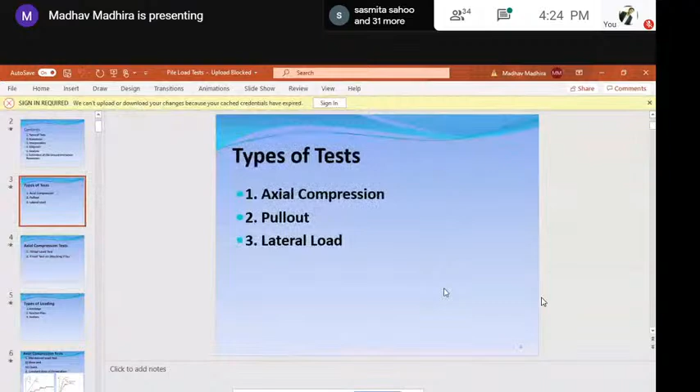Then on the working piles, we had, yes. Slides are not visible. They are not shared. It was there. Since you logged out and again logged in, you have to share it again. Sorry. Again, I don't see that. Let me log out. Very strange. How about now? Not yet. It's there on my screen, and I said share. You select the share window and then choose PowerPoint. Present now, your entire screen. Okay, then I click on this. How about now? Now it is coming. Okay, thanks. Sir, you press on the hide thing. Full screen, you can make it full screen. To the right of stop sharing, hide is there. Okay.

My apologies for the technical problem. So the contents of my talk would be types of tests, procedures, interpretation, diagnosis, analysis, and pile ground interaction parameters. The types of tests we talk of, as I said, are mostly for axial compression. We may like to do pull-out too, and lateral loads are an option where the buildings are tall or the tower is very high, particularly for wind turbines. That is important. Then we do two types of tests.

One is called the initial load test. This is done before the piles are installed for the structure's foundation. This is to verify whether our design is correct or not. If the estimated load is much less than what is possible from the field, you can revise your design so that you save a lot in terms of number of piles. Whereas if your design load is more than the actual result from the load test, which means the soil is not able to take it according to our estimate, we have to redesign, maybe increase the number of piles.

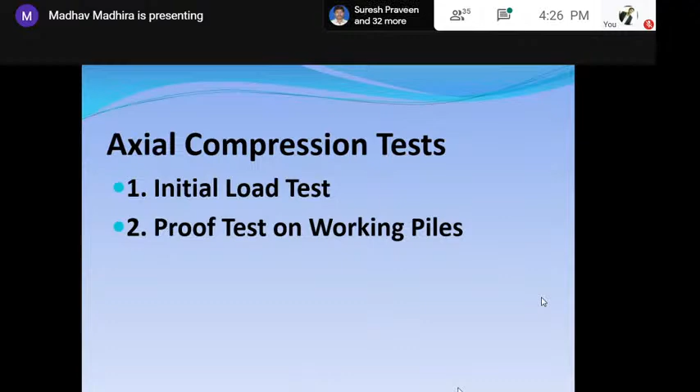After that, once the construction starts, we have to test a few piles, roughly 1 in 100, 1 in 50, 60. We verify whether the design load is being achieved or not, particularly with respect to settlement. Initial load test we carry on for 2.5 to 3 times the design load if failure is not possible within that range, and then we try to extrapolate to get the failure load. Whereas proof testing is generally carried out to 1.5 times the design load, and we make sure that the settlements are within the allowable range of, let's say, 10 or 12 millimeter at working load itself. These are the kind of tests we do. Then the types of loading: you put a dead weight, called kentledge.

So you have to create a huge dead load by stacking girders or concrete beams or sandbags, etc., so that you can take a reaction through the jack and get the loading. Another alternative would be to take reaction from adjacent piles. Suppose I have a number of piles in a group and I want to test one of them, I can take reaction from the other piles and do it.

Third, if I don't have those, I can provide anchors, 2 or 4, whatever it is, connect them up and then take the load. In this case, the load is transferred back to the ground through anchors. It's very similar to reaction piles.

Then in terms of the types of tests we do, one is called the slow test, wherein you apply the load in increments. And the increments according to our code is, very unfortunately, a small number. They say 4 is enough. That means 25%, 50%, 75%, and of course 100%. I, for one, would prefer a 10% increment in load, and then you maintain the load, so that the displacements more or less become constant under each load. Then increase the next load and go. That is called the slow maintained load test.

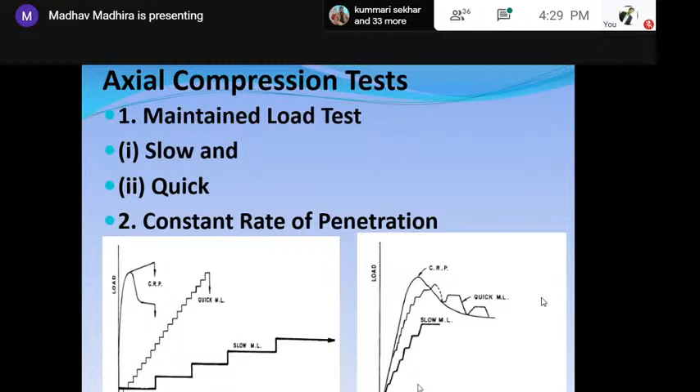The other one which people wanted to do, like your triaxial test, etc., is the constant rate of penetration. It used to be very common that people were trying this earlier. They push the pile continuously and take the reaction. That means the displacement rate is constant, but the loading rate is not. And if you look at the curves on the right, you can see the slow maintained load test gives you a lesser load than either of the two. Maybe at large displacements they may all become equal, but at working load, the slow test gives you more settlement and less load. So we need to always go for a slow maintained load test.

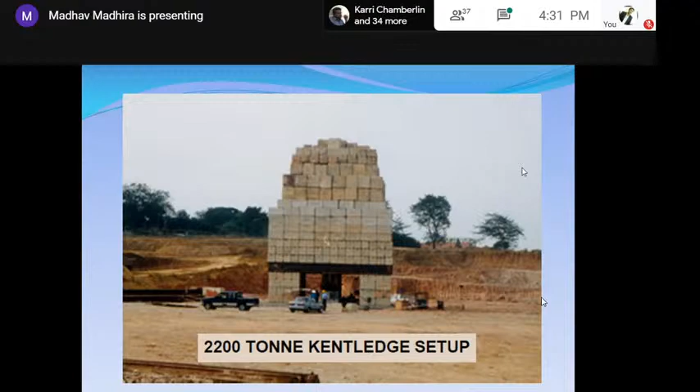You can see the kind of load. This is a huge pile that they are testing. The total load they were expecting was around 2,200 tons. That means the kind of cement block they put in, if you look at the person's height, is maybe something like 8 to 10 meters high, which is a very risky thing. But this is the problem with most pile load tests. If you want a high capacity and do the test, it can be very risky sometimes and very costly too. So please remember that pile load tests are very expensive, so we should be very careful and make sure that we can get away with the minimum number of required tests for the initial load test.

This is the typical Indian version where we keep on putting sand-filled bags, jute bags, or polythene bags, etc., unlike the blocks that we have. And of course, here you cannot get probably more than 200 to 300 tons capacity.

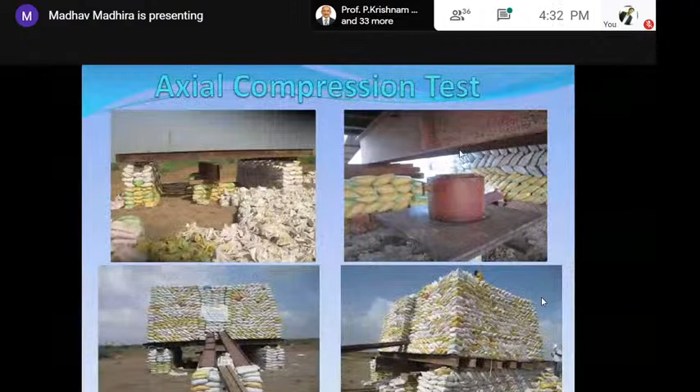And even to reach the top, you need to have some kind of a ladder or a slope. Then if you want to do the actual compression test, you need the jack, as you can see here. And this jack is adjusted so that you can get the reaction from the beam at the top. So please note that it's not a very simple thing we had to do. But more recent ones are simpler than this.

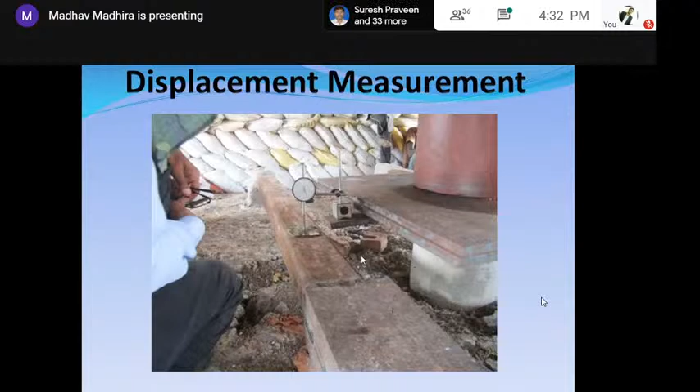We'll see that later. When you want to measure the displacement, you have to have the support as far away from the pile here. So we put another huge beam or I section, support it far away, and put our dial gauge and take the displacement of the pile with respect to the datum that we have put in. So this is a dial gauge, but nowadays we have LVDTs and electronic ones too. So this is the kind of schematic we're talking of.

And one other thing I wanted to tell, which maybe the industry may not like: make sure that the pile is not preloaded without your knowledge. This happened a couple of times in my experience. So what we do is we take the jack with us away so that the pile contractor cannot preload. What if it preloads and unloads it? Next day when you go, what you get is only the reload displacement and not the original one.

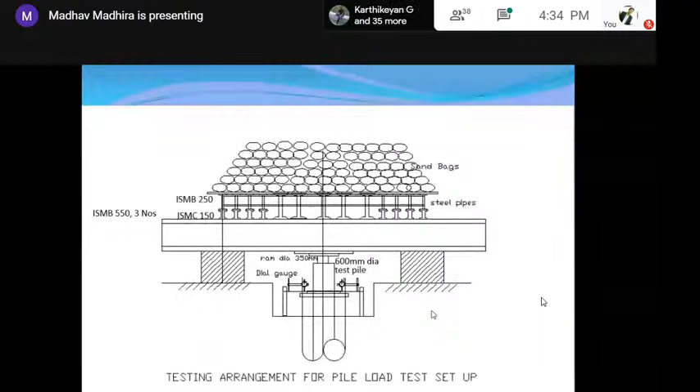This is another pile tested, 600 mm diameter. And you can see very similar ones, a lot of sandbags, heavy I sections to do the whole thing. The load is sometimes not measured through a load cell. We have a proving ring also to take care of it. And here, as I said, you can have dial gauges or LVDTs. And this pit is to put the pile at the cut-off level and not at the ground level.

Jacking method is another, wherein, of course, this is basically the same thing. We are using a hydraulic jack and then we keep pushing it, which is the same as what we are talking about. In order to minimize the interference, as I keep saying, you keep it as far away as possible. In this case, of course, not Kentledge, but more of anchors and reaction piles. And you can see that if this is the pile tested, the support system is very far.

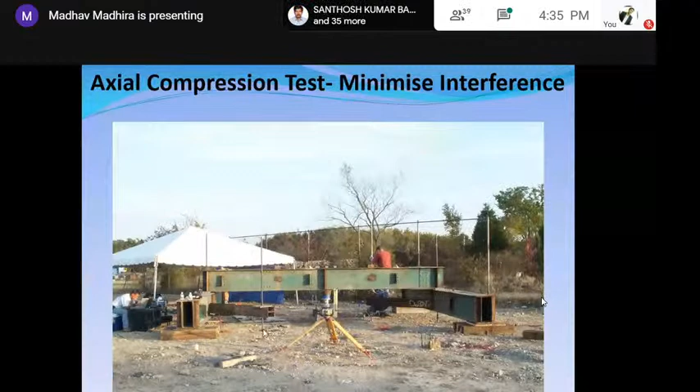When you try to measure the load settlement response, if you have an idea of how it is going to be, I want you to visualize this. This may be the total load settlement response, but if you look at the shaft response, the shaft is mobilized at a very small displacement. Let me assure you, most of the time, the shaft resistance is fully mobilized within about 5 to 6 millimeters of displacement. Whereas the base resistance takes a large displacement, maybe 10, 20, 50 mm too. So actually at working load, you can see the shaft is the one that contributes most of the load. So you should be able to see if you can modify your load test in order to find out.

If you can't, we'll see at the end of my presentation how to estimate these components: how to estimate the shaft resistance, how it is mobilized and the ultimate value. Similarly, the base initial stiffness and the ultimate base resistance too. This is what I call, you need to analyze the whole thing and not just say, I got some safe load at 12 mm settlement. You need to understand how this load is getting mobilized in the pile.

And sometimes you find that when you do the test in case of either dense sands or medium dense sands or clay, you may get the shaft resistance, and then there may be some kind of softening possible, because this is the strain softening you get after the peak. So you can see shaft resistance may not be fully mobilized after a certain displacement.

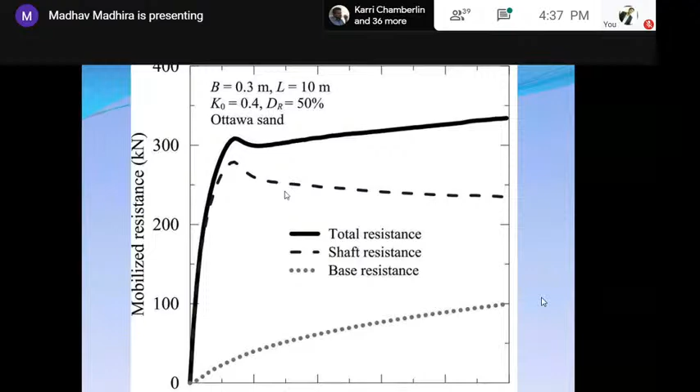Many times, what we do is we load, unload. So you can see here, if I have the time load curve, initially load is increased up to 300 tons. Then we unload. In the second cycle, the load is taken up to about 600 tons, unload, and then we go to the 800. So when I look at the displacements, we maintain the load, then we unload, we get some rebound, but then in the second cycle, the rebound is much less, so you have permanent settlement.

And when you go to the third cycle and unload, you may end up with something like even 15 mm permanent settlement. This is particularly necessary when you have cyclic loads or wind loads coming onto the pile. So this is the kind of curve you can get. First cycle, unload, second cycle, unload, and third cycle. You can see, as I said, the permanent settlement is on the order of 10 millimeters, total was 22. So the rebound is about, say, 50% or a little less than that, and you get this kind of behavior when you do your stage loading or increments in cycles.

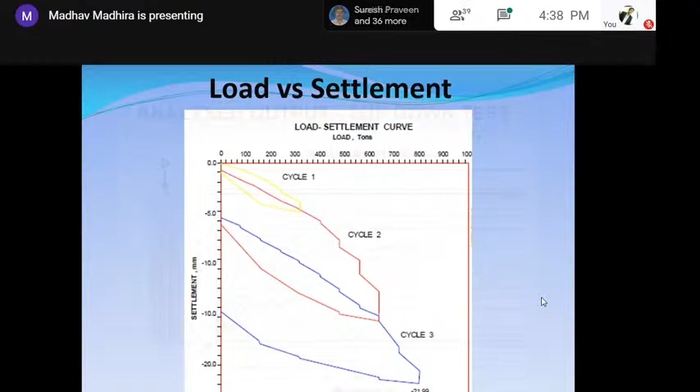I want you to analyze this kind of a thing. If it is possible, I want you to visualize how the load is being transferred from top to bottom. And I want you to visualize this something like your seepage. When you have seepage, the flow takes place from the upstream to downstream. And similarly, the load is getting transferred from the top to the bottom.

Somehow we think the end bearing piles are great. Only if you have extremely soft soil does it happen. In many of these soils of intermediate capacity, at working load, the base load is not very important. So I keep showing this in order to illustrate it is the shaft resistance which controls most of the time.

Okay, then if you have the instrumentation, if I have only the top displacement gauge at the top, I can get the displacement at the top. But we have no idea about how much is the displacement at the toe. And the displacement that you see is because of the compression of the pile and the settlement of the toe because the soil is compressible. So these are the two things we need to measure.

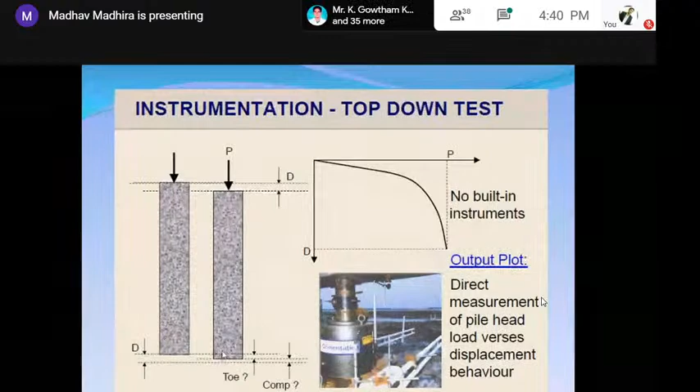And in the modern version, you will find people are trying to measure the displacement all along the pile, which is a very good thing, and particularly at the toe too. So if you don't have an instrument, this is the kind of thing you get. But if you have good instruments, you'll be able to predict or measure the toe displacements and those at intermediate points.

I want you to realize the importance of interference. You know, even if I do the Kentledge or dead weight, before I do the load test, this is the pile. I have the two footings here on which I'm putting, let's say, 600, 800 tons, which means that load is getting transferred through these two bases adjacent to the pile, and the soil below will try to get compressed, it will settle. As it settles, it is trying to pull the pile down, so you will end up getting a down drag on the test shaft. Please remember, already the dead load, before you started loading, is itself causing the pile some down drag.

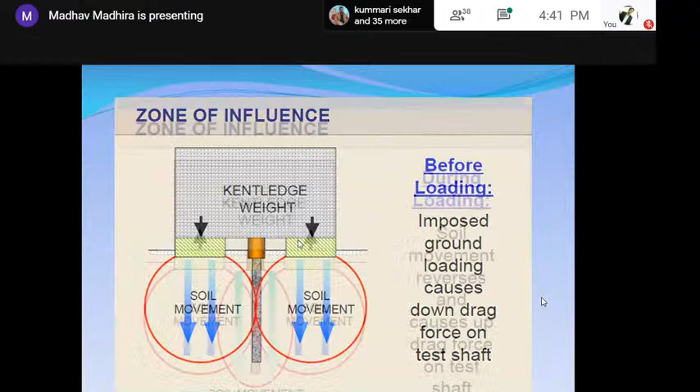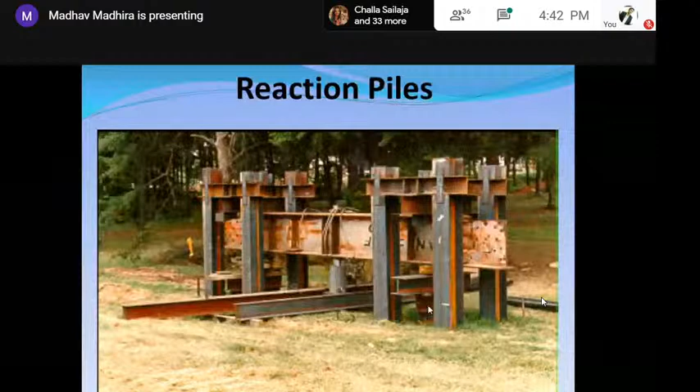The load is getting transferred here, which means the load is transferred to the pile and the support system is carrying less. So the soil movement here is negative, is upward, whereas here it is downward. It's a very complex interaction that you will find, and what we think is the ideal pile response, it's not really true. When you have reaction piles, what we do is one pile here and adjacent piles here, and we try to transfer the load here.

These are the two reaction piles in a pile group. So when I connect with the beam and again apply the load, these are subjected to pull out here. Again, you have to maintain a minimum spacing of at least 2 meters away from the test pile. Otherwise, you may get some interference. People say 2 meters or at least 3D, so which is 600 mm diameter means 2 meters is good enough. So these are the kind of interference effects you will have on the pile.

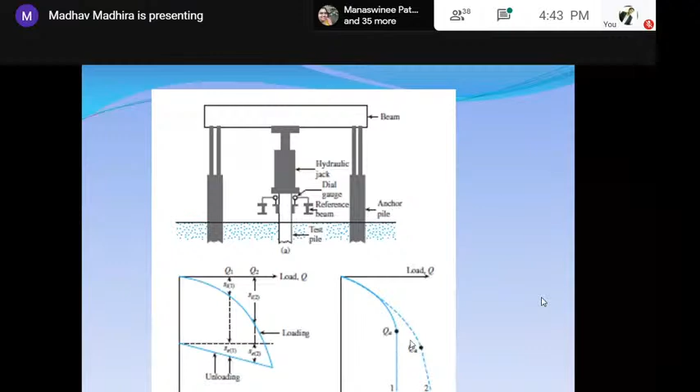Okay, so you can see here the effect of these two would be loading and unloading, and when you unload, you will find the net settlement is much less than what you get during loading. This is what I wanted to show you with regard to anchor piles too. In this case, the load is transferred to the bottom of the anchor pile or the anchor. So these are the reaction piles, and zone of influence, maybe you can take some 1:2 kind of. So when the reaction is taking place, this part of the pile will get affected because of the load transfer on either side of it.

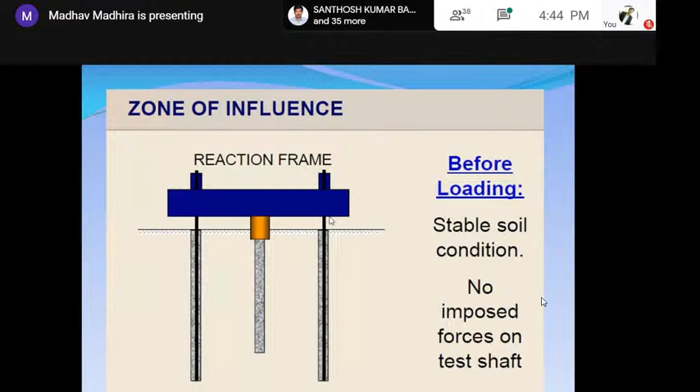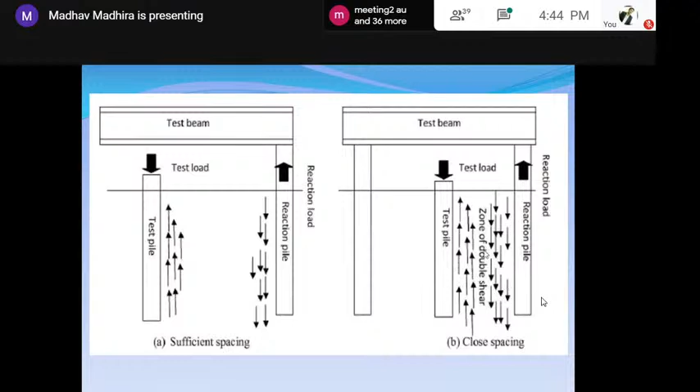These are the tension piles, as I said again. Influence zone, reaction frame, no forces. But now if you have, during loading, the tension pile may have some interference here, depending on the spacing. So if your spacing is more than 3, some codes specify 5, so you better decide that the spacing can be large enough. This is what happens. When I put the load, the soil will try to oppose, the shear stress is upward. But as far as the reaction pile is concerned, because it's under tension, the soil is trying to oppose it, you'll have downward. In this close spacing, you will find that the two are interfering with each other, and the response of the pile may not be ideal, what you can see.

There's another interesting test somebody devised recently. He said, I don't want the whole pile to be tested. He wanted only a part of the soil bearing stratum. For example, this part is not necessary or required in terms of load transfer. So what he did was he cast a grout plug here, put a steel plate and pulled this up. So you have only the shaft resistance mobilized in the bearing stratum, and we're not considering the resistance in the upper one. If you want to isolate, this is what is called the plug test.

But again, I have one issue here. When you are pulling it up, this is a load test, because it's a pull-out test, we are getting the tension kind of a thing. The shaft resistance under pull-out may not be the same as in compression. That's another thing we will see. And sometimes you find that the plug movement may not be immediate, which means there's always a slack. You have to correct for it. And then if you correct, they can have an ideal.

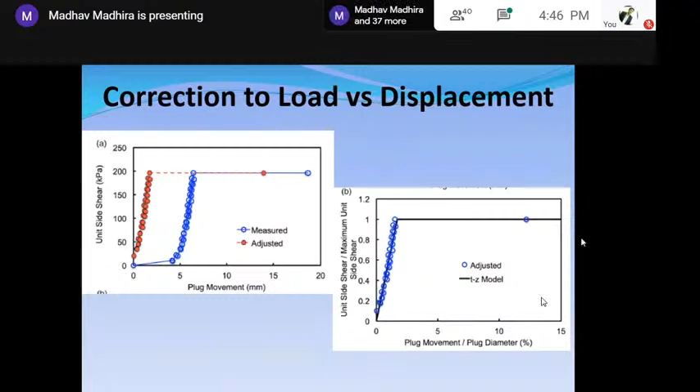This is because it's purely a shaft resistance. You will find that the shaft load is mobilized at very small movement to pile diameter ratios, maybe less than 2% as we expected. And after that, the shaft resistance is at the ultimate value. This is called the plug test. The problem, as I said, when you have these heavy loads, and if you don't anchor them and make sure everything is perfect, this kind of failure.

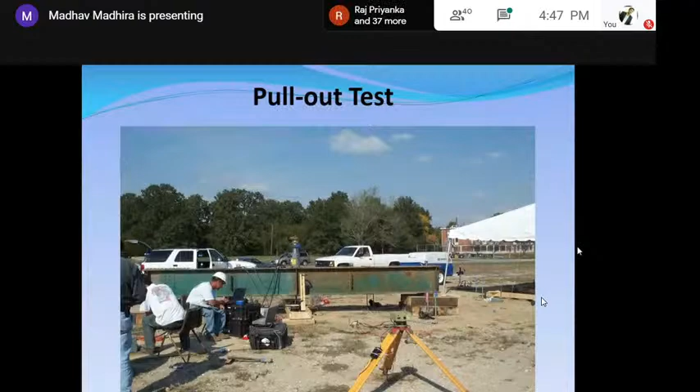The displacement should always be far away, and you have to put the support as far away as possible to get your displacement safely. Don't let anybody get near the load. Make sure you do this kind of thing.

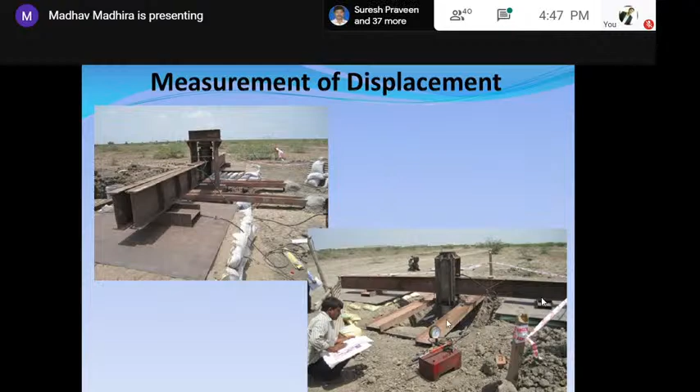So this is the schematic of the pull-out test. This is the pile and it goes into the jack, and then from the beam you take the reaction. And these piles will now be under compression because this is being pushed up. And so these are the two dial gauges. We have enough space so that the travel can be measured.

Then when you do a lateral load test, I want you to realize a very interesting aspect of it. A pile, if it is not embedded in a pile cap, is free to displace and rotate at the top. Then it's called a free head pile. Most of the piles we test in the initial load test are free head.

But when we actually construct the real pile, it will be embedded inside a pile cap, which means it is not allowed to rotate. It can displace laterally. So the pile's head is fixed. Behavior of a free head pile is very different from behavior of a fixed head pile. So you have to use appropriate theoretical conversions or correlations so that whatever response you get from a free head pile can be changed to fixed head pile.

This is lateral load testing. You can have a pile and then get the reaction. What we sometimes do is use two piles and push each other. That's much simpler. Unlike in the case of axial load, you don't need a kentledge. Here you are taking reaction from another pile, but you are not measuring the displacement of that. But more commonly, here you can see, taking reaction, you are pushing one and measuring the displacement.

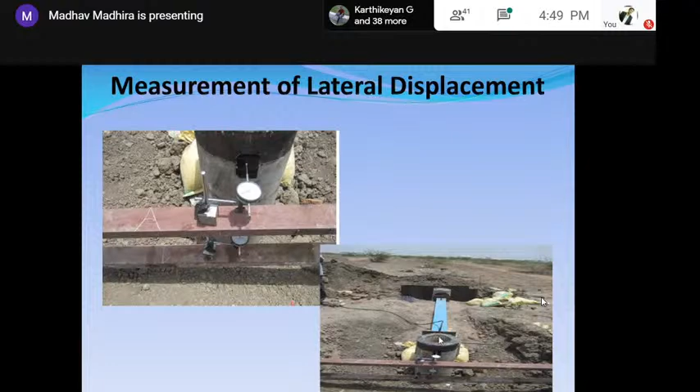But you can also have a two-way test, which means I have one pile here, another pile here. I put a jack and I can push both of them, and I get two for one. So you're testing two piles at the same time and you can then get the response. This is a much better way of doing it rather than taking reaction from a dead load or a pile cap somewhere. So this will be a better way of doing the test.

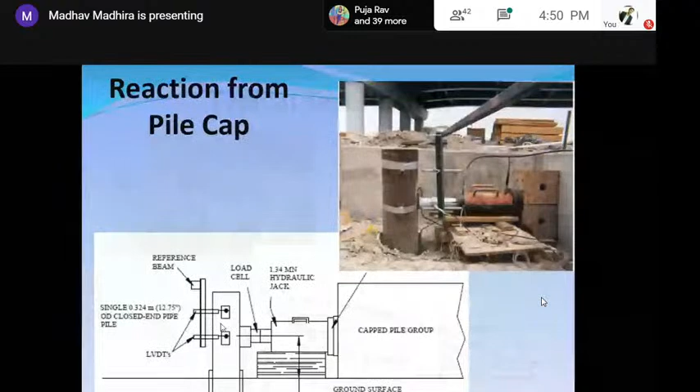This is what I was telling you. I have a pile cap here and a pile, so I'm taking reaction from the pile cap. This means only one pile is tested. If I have two piles, I can take reaction from each other and get the two-way loading. And this is the typical lateral load displacement.

And I want you to realize that lateral load capacity is much less compared to the axial load. For axial load, we are talking in terms of say 80, 100, 200 tons of safe capacity. Whereas here you can see it's hardly 10 to 12. Why is that? Axial load behaves like a column, but in lateral load, the pile behaves like a beam. And in a beam, displacements are very high. So even under a load of something like, let's say, 10 tons, the lateral displacement is about 2.5 to 3 millimeters, and we normally try to conduct up to about 5 millimeters only.

Sometimes this could happen when you're doing the test: there may be a separation between the pile and the soil if you're doing a cyclic load test, particularly for lateral loads. You can see here, when you're applying load, let's say the pile moves to the right. When you remove the load, the pile can go back because it's more elastic. Soil being inelastic won't rebound. So which means there's going to be a gap.

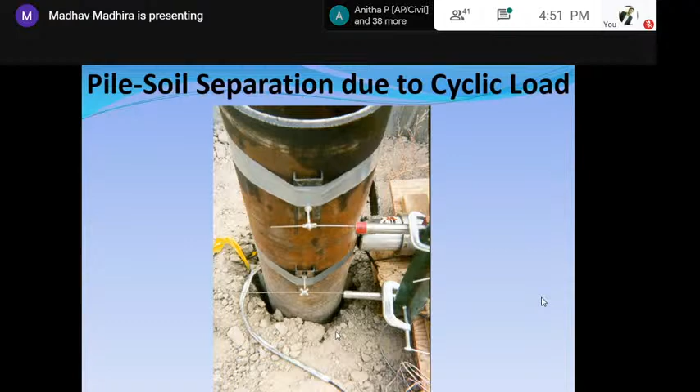So when you're doing cyclic load, if you are getting cyclic loads on your pile, be careful if there is a possibility of separation between the pile and the soil. This is particularly true for offshore piles and all these modern wind turbines, where you have a very long pile and you may have large lateral displacement.

The latest in this, which is probably the best thing that happened to our geotechnical engineering pile load test, is we have a load cell embedded somewhere in the pile. In this case, it's at the bottom. This was originally designed or developed by Osterberg in the USA. So it's called the Osterberg cell, or O-cell.

So what we have is the load cell at the bottom of the pile, and you have the pump, and through a pipe I can inject pressure into the jack or load cell. So the bottom of the pile is loaded in compression. The upward one is being pushed up. So one load cell will give you compression at the lower end of the pile and a shaft resistance above. So you don't need any kentledge. All that you have is the reaction from the pile itself.

And so this has become very common. And now they have been using it in a number of tests all over Bombay, I know Haryana, Himachal, etc. I believe the Bandra-Worli sea link piles have been tested with the O-cell, and you get the complete response because there's no need of the reaction at all. No kentledge, no reaction pile. The load comes from the soil, the ground itself.

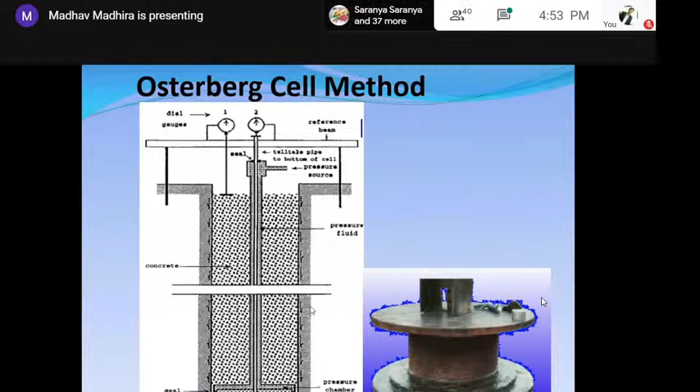This is the schematic. So when you apply the load here, this one is going down at the bottom, so the reaction is upward. The shaft is going up, the reaction from the soil is downward. So this is how both the shaft resistance and the base resistance are measured. But my only limitation is that the shaft resistance you get under pull-out upward force is not the same as what you get from downward. There is one risk in terms of that, which we may have to analyze properly.

And to overcome that, this is one of the nice alternatives. Don't put the O-cell at the bottom, but put it at an intermediate point of the pile length, maybe halfway, 2/3 from the top. So the lower part of the pile gets compression and positive friction, whereas the upper half gets the negative or pull-out test kind of thing. So you know the kind of shaft resistances, and recently one of my students has got the result and shows that the unit shaft resistance above the O-cell is very different from that below.

Now the mechanics of it. You have no imposed forces before loading. Once you apply the load, this load is downward. This load above the O-cell is upward. So please note that this is how the mechanism works too.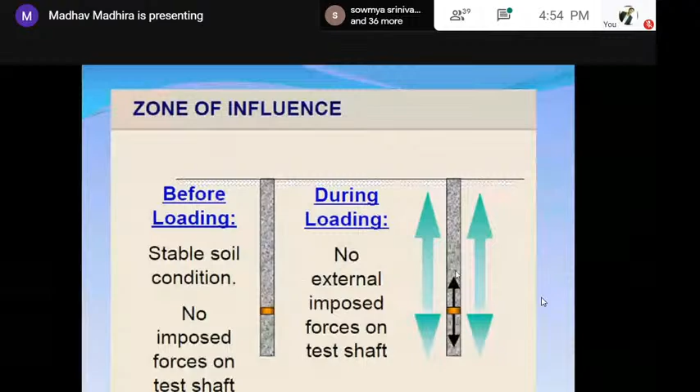And then the way the load is distributed, again, I want you to realize in the O-cell test, the maximum load is at the bottom and at the top it gives a 0. But in a traditional standard test or typical load test, the load is maximum at the top and it decreases to the bottom. So this makes a big difference in terms of interpretation. But what Osterberg said is that the load is going to the end bearing zone properly, whereas in the standard test, very little load goes. So if you have a bearing stratum, I would say go for the O-cell test.

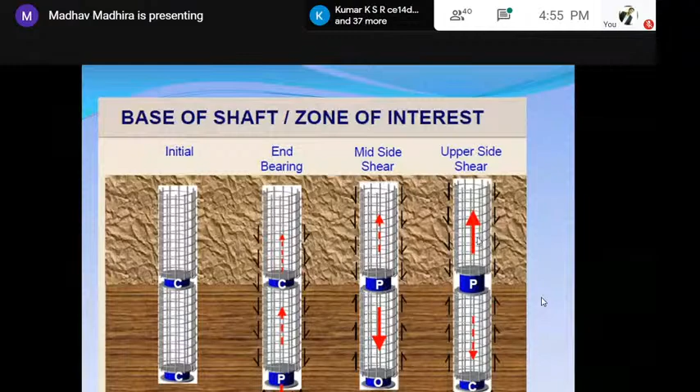Okay, so here are the different mechanisms I can see. As you keep increasing the load, what kind of mechanism happens? This is end bearing, where you have all the load, then mid shear, and then the side shear getting into the picture. So at various stages of testing, you'll realize that. And for this, you need different types of measurement.

So here, the reinforcement, and you need a displacement gauge if you can put it here. Otherwise, you'll only be getting the displacement at the top. Nowadays, people are able to put in some displacement transducers also. So I get displacement at the O-cell itself. And the load displacement of the upper part. This is one of the ideal ones.

So this is a kind of expensive one, but better than your cantilever. Probably the O-cell will cost you maybe about ₹1,00,000, but a static load test will be much more expensive than that.

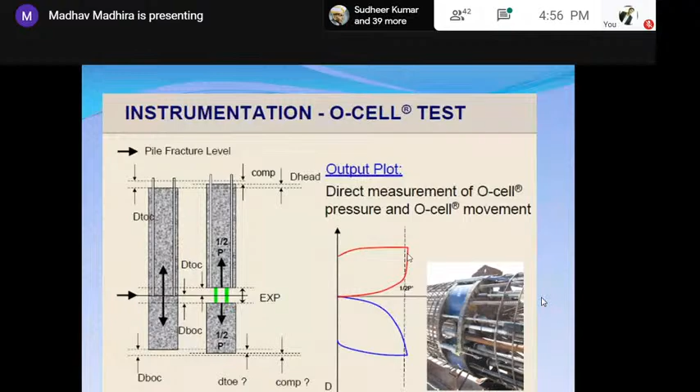This is the load displacement response of the top and bottom half, as you can see, and you can see the difference. Whereas in the bottom, the load may be the same, but displacements are very different. You can get some 20 mm as you go deeper because the shaft resistance is less and base load is more, whereas in the upper one, the shaft resistance is mobilized much faster and you get the maximum displacement of about 15 mm. And if you have strain gauges, this is what I would also say.

I'll show you some more results of this kind later. Suppose I have strain gauges at different locations. I can measure the strain here, converting to load. I can see the load is transferred at different rates above and below. This is another way you can interpret the whole data, and that gives you a lot more information.

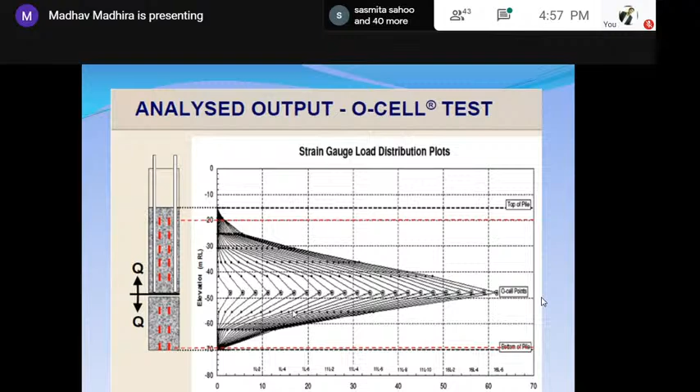Now, there are a lot of dynamic tests. One is called the small strain, which tells you the pile integrity, and then the large strain gives you the pile capacity. I'm not going to cover that because we have another lecture from one of our colleagues there. These are all small strain.

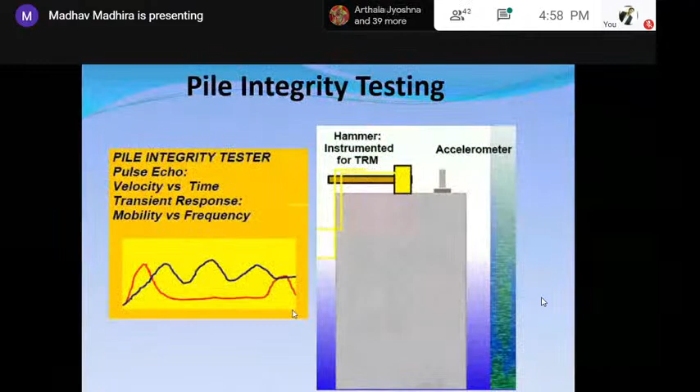You can tell what kind of defects are possible from the kind of response you get. It's called pile integrity testing. And you can find out the defect from the response, whether the bulge is there, necking, cracking, poor concrete. All of these are possible with the pile integrity low strain test. These are the kind of possibilities.

Sometimes, this is a bigger problem. In most of the bored piles, we had one case recently, the muck is not removed properly, so the pile didn't get any end bearing at all. Another interesting one is the reinforcement is not vertical. And these are all, of course, the necking problem, bulging, etc. These are the kind of problems.

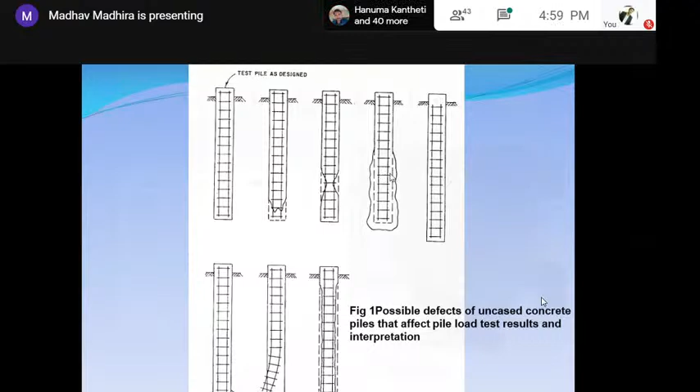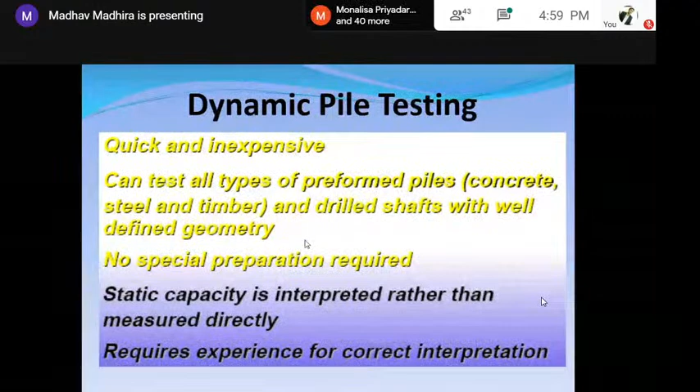This is the typical example. The concrete didn't go to the bottom, and so you have a gap here. And you can see bulging that happens in case of soil collapsing, if this borehole is not supported with either casing or a fluid. So basically, dynamic pile testing is preferable, but static capacity is interpreted rather than measured from dynamic testing. We do not know what exactly it is. It's an analysis, but some people are very good at that.

You may have to analyze it to see how much of it is shaft and how much is the base. People try to estimate failure load using different methods, by finding out what is the increment in load for each millimeter or 2 millimeter settlement, and then finally you put in the asymptotic value, you get this value. Similarly, you have several methods. This is the extrapolation of our plate load test data, where you plot load on log scale and find the intersection of the two tangents. It's not necessarily ultimate load.

I can say this gives you the yield load, beyond which, if you increase the load, the displacements will increase much faster than the initial part. Then there is the hyperbolic Chin's method, which is a very interesting one too. If you do not take the load to ultimate failure, he says, let's assume the load displacement is a hyperbola. So let's plot settlement divided by load against settlement, and you will get a straight line, and the inverse of that gives me the ultimate load. The initial part gives me the soil stiffness. So this is a very common method of extrapolating the result.

In this case, you are able to get near final load, but not the ultimate load. This is what you estimate. And you can see the criterion keeps changing. Davisson gives you a criterion saying that the load corresponds to the elastic compression plus some constant based on the pile diameter, and you get this value. So one can work out different ways, and there's always a range in which you get your ultimate load too.

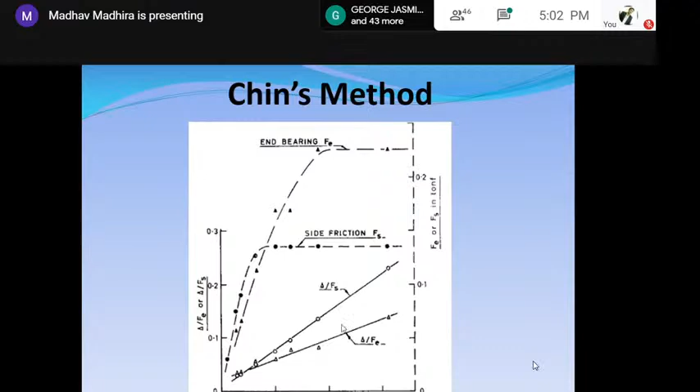So this is Chin's method. You can see people have measured both side friction and end bearing. You can see that looking like a hyperbola. So you're plotting the displacement by load against displacement, and you get a straight line. The inverse of that gives me the ultimate load. These are different criteria that we have. I just put them in. You can use any of these to estimate the ultimate load. Not ultimate load, but the so-called yield load.

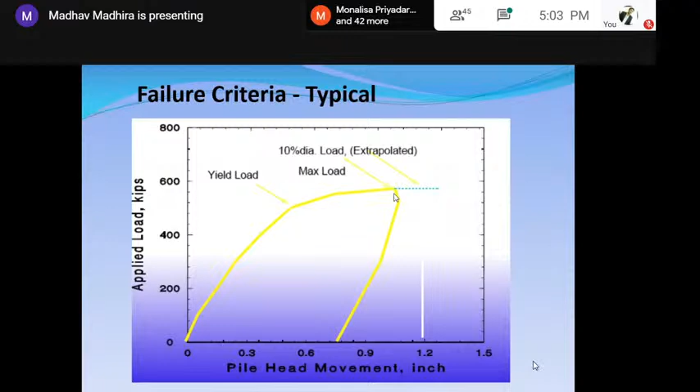So one of the most common things we talk of is 10% of the diameter of the pile is considered as a maximum. But as you can see in this case, the slope changes at some moment. So this is called the yield load, and this is the maximum load corresponding to 10% of the diameter. And so we can take this as our maximum load and use a factor of safety to get the working load.

And you can also use some tangent intersection method. I fit in a tangent here, another tangent, but that's not a very reliable one. This is the Davisson method, who says you take an offset of 1/120th of pile diameter and then 0.15 of an inch, and that is what he calls the elastic line. He claims this as the failure ultimate load, based on which you can get back your safe load.

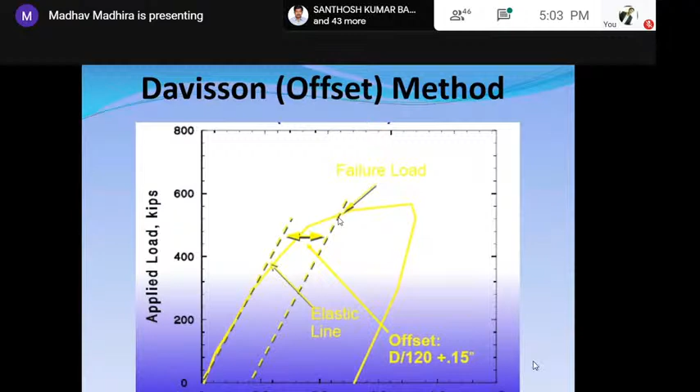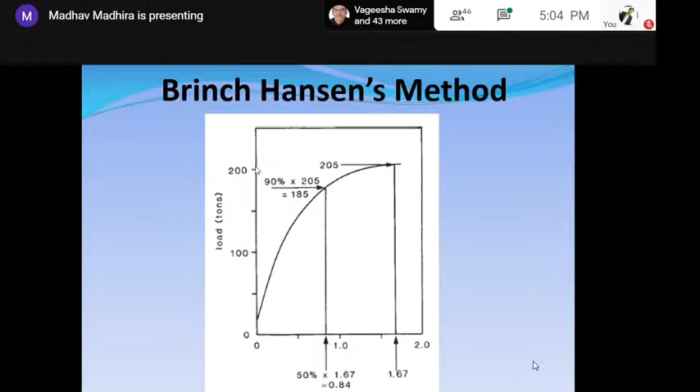Brinch Hansen uses some kind of extrapolation in terms of 50% of the ultimate load you get, and where you get 90% of the load. But when I look at a pile load test, I look at this kind of diagram. You can see the capacity is almost constant after about, say, 2 to 3 millimeters. So I immediately judge that the tip is not taking any, and mostly the pile capacity is because of friction. In this case, I would say about 80 tons, that load is taken by the shaft, and maybe another 10 tons by the base, etc. You can easily interpret. This is a typical ideal case where you have friction and end bearing come into the picture.

In a stiff clay, I can get strain softening as I mentioned earlier. In case of loose or soft clay or loose sand, I won't get this kind of softening. This is another, if there is a gap here, then I realize that there must be a slip, then the pile catches up and gets the second curve too. Okay, and in this case, it's a weak concrete, our pile shaft sheared completely, and so instead of getting this, I'm getting pile failure itself.

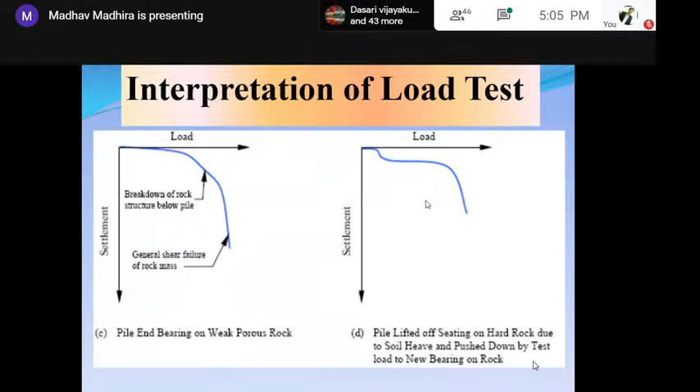Now this tells me the pile is taking load, but then there must be some failure below, and then you catch up with the rock again. In this case, the pile got initially displaced, some lift off, and then a new bearing stratum has come in. So basically, when you're doing interpretation, please look at also these possibilities. Is there any chance of negative skin friction, either because of the loading itself or because of some softening or preloading that's going around, the soil may compress.

What about groundwater conditions? So within the test, let's say the groundwater table is at a height of maybe 5 meters from ground level. But in the life of the structure, if the groundwater level rises, we'll have a slightly lesser load, so you have to take care of it. The most important thing for bridges is the scour. You're doing the test now at the bridge site from, let's say, the top to the bottom. But if the scour happens, you lose support in the top, the scour depth or 1.5 times the depth.

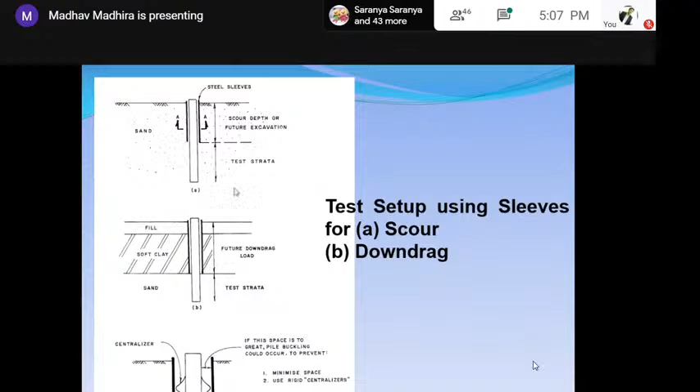Okay. So if you want to take care of that, you have to provide a sleeve and measure the displacement only in that strata which you expect the support to come from. So basically here, you can see the sleeve is here. No load is transferred up to the bottom of the scour depth or where downdrag is likely to be, in this case, soft clay. So if I'm expecting downdrag, I'm expecting only resistance here. So I do not allow resistance to be mobilized over this too. Okay. So be careful about testing in these special cases.

Pull-out test is much easier because it's only pure shaft load. So you apply the load, which is tension, and you get the displacement and take a factor of safety. There is no bearing at all, so you get only the shaft resistance. This is the typical pull-out test, and I want you to look at the displacement.

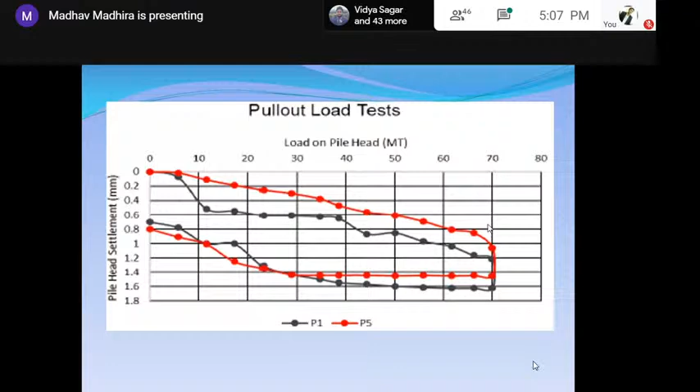They're hardly less than 2 millimeters, and you get your total load, maybe 60, 80 tons, which means I divide this load by pi dl, the cylindrical area, I get the unit shaft resistance. Load transfer, I think we talked a lot. This is again what I want you to realize. Load transfer is always interesting, how the load goes to the bottom. It's like a flow to me. So the base load is much smaller generally. Most of it goes to the shaft.

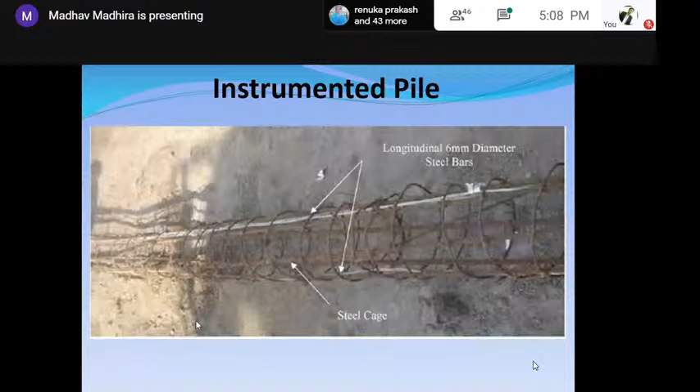So what people are nowadays doing, in the steel cage you try to introduce some reinforcement, strain gauges, so you can measure strains at different depths. You can put the load cell at different places. This one particular case study I have, wherein we have a pile, we have a load cell at the bottom and vibrating strain gauges at different levels. From this, you are able to get a lot more information as far as the pile is concerned, and you can see the load mobilized at different depths over the length of the pile. So I have very interesting data. From here, we can do a lot of analysis. And I want you to see how the loads are transferred from the top to the bottom, different pile capacities.

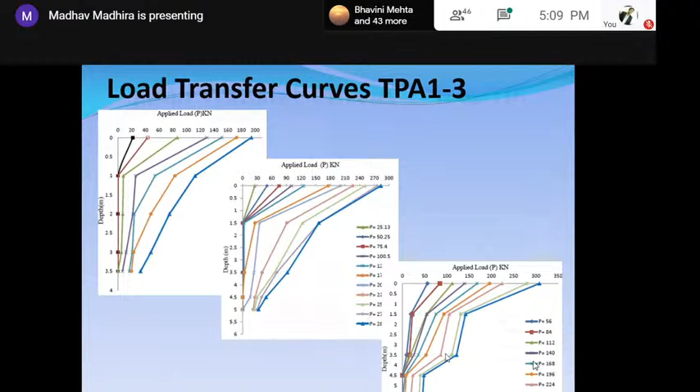In one particular site, they have done about 8-9 piles. And here is something very interesting. In this case, the load is transferred up to, let's say, 300 kilonewtons. Nothing goes to the base. Only once you cross that, the slip takes place possibly, and the load is going to the bottom. So these are the pile segments. Because I know the loads at different elevations, say the load is 60, and here is something like 10, 50 kilonewtons is transferred over 1 meter, from which I can calculate the shaft resistance.

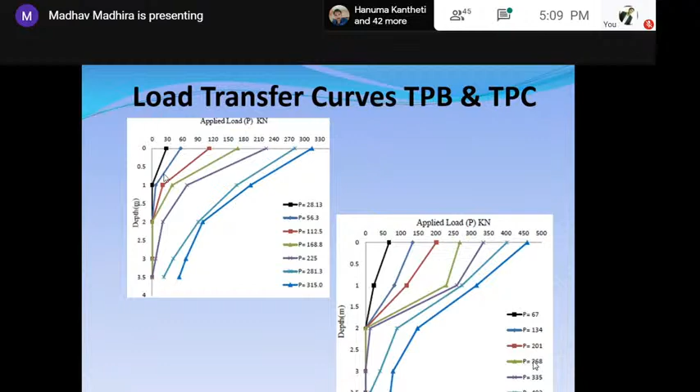So I'm able to estimate the shaft resistance over different segments. 0 to 1 meter is about 130 kPa. 1 to 2 is 50, 60. Like that, you can see how the whole thing is being transferred. And we're also able to measure the base load. So we have the base load response, the total response, from which I can get the shaft response too. So this is how you can improve your study by putting a load cell at the bottom, and you know the response of the pile in shaft resistance and base resistance.

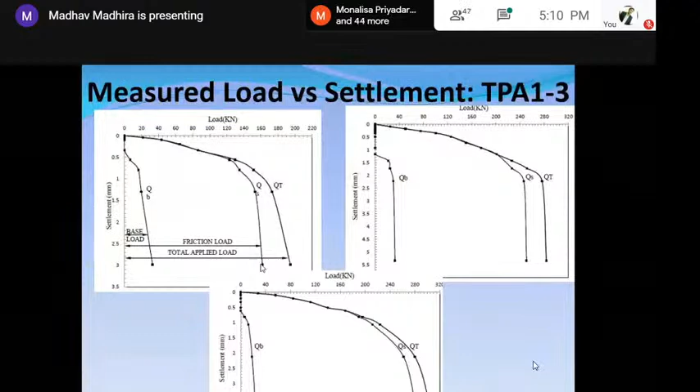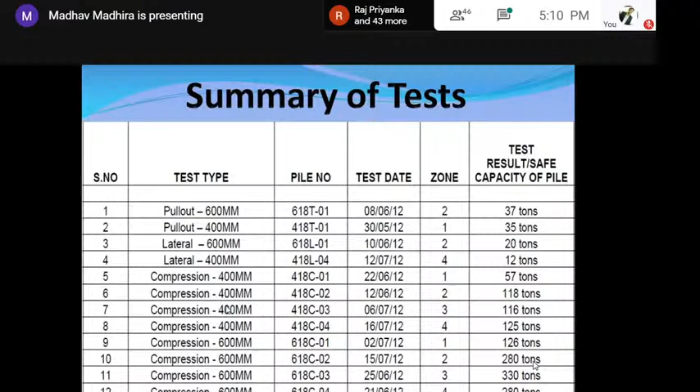These are somewhat very interesting. And I want you to notice, sometimes the pile base doesn't move till it gets some load. So that's something very interesting, because till that displacement, all the load is being transferred to the shaft. So the tip resistance is negligible. So these are the kind of test data that we had got from that particular case, where we had 400, 600 mm diameter piles, and we have the capacity of the piles. Pull-out test and do very similar analysis.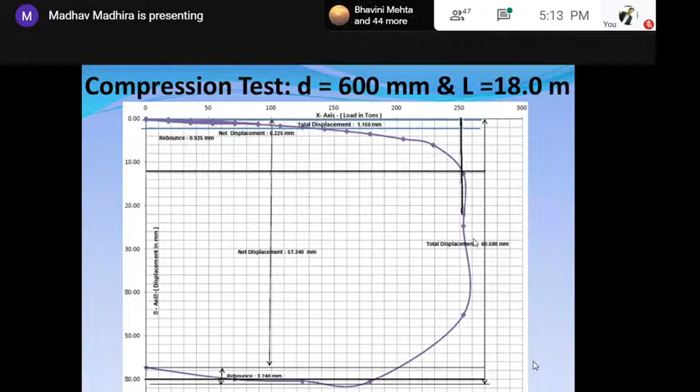Cyclic load test, good one. These are again pure shaft resistance, very little tip resistance here. And the pile goes down once it crosses the 250 tons load, and the displacement is hardly about 10 millimeters. That's it. So this is a friction pile again, even though it's designed as a friction and end bearing pile. So this is the pity, that unless you do the test analysis, don't ever take for granted that the end bearing is possible.

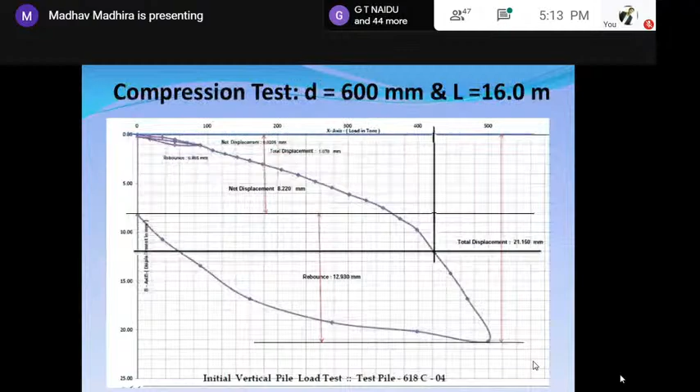This is a pretty good one in terms of almost linear up to 500 tons. There is some slight dip here, but then it catches up too. These are different load tests. So what we try to analyze would be, this is one of my students' work recently.

He said, I try to look at the pile loaded. So this is a total pile, shaft resistance and bearing. So I try to put it as a non-linear Winkler springs. And so if I now put in the hyperbola for the total pile load, you have P ultimate and the pile stiffness. But I wanted to find out what is the shaft resistance. Again, I put in this kind of hyperbola here. K tau is the shaft stiffness, pile soil shaft stiffness, and tau max is the maximum shaft resistance.

Similarly, the base is another nonlinear spring. So I have Kb is the subgrade reaction coefficient for the base, and this is the ultimate load, which means if I know the response overall, P ultimate and Kp, can I get K tau and tau max, that is pile soil stiffness and the unit shaft resistance, and similarly base stiffness and base ultimate load. We could develop some simple theory using this hyperbolic relation, and we could estimate now what are the different values and compare with what IS code is giving.

I want you to see here. This is the average N value along the shaft, 81, and if you correct for N using that formula, you get 44, and the tip is 51. But what I want you to do is, these are the estimated from the actual pile load test. I get 34 kPa as the unit shaft resistance from a pile load test. But look at our code, gives me 88 here. So the code is over predicting, whereas it is less. In this case, it's the other way. The code is predicting 58, whereas I'm getting 115, 56, 98.

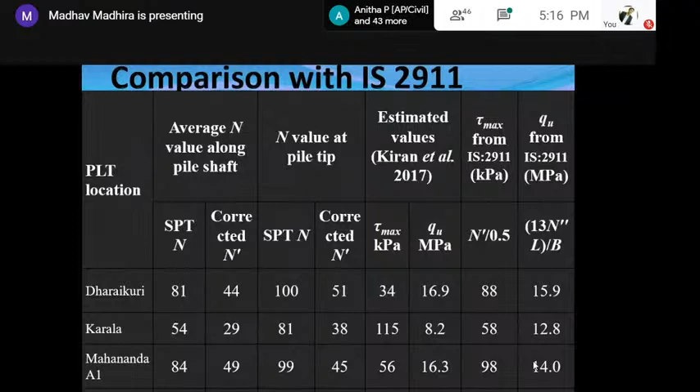So what I would like to say is that pile load test is not just to estimate ultimate load. You can use it to identify the defect. You can also find out the initial stiffness. You can diagnose the thing and refine even the load transfer to suit your own condition. So I just would like to listen to you if you have any comments.

I have a pun here. Parallel lines have so much in common. It's a shame that they will never meet. So if you like puns, it's a good one too.

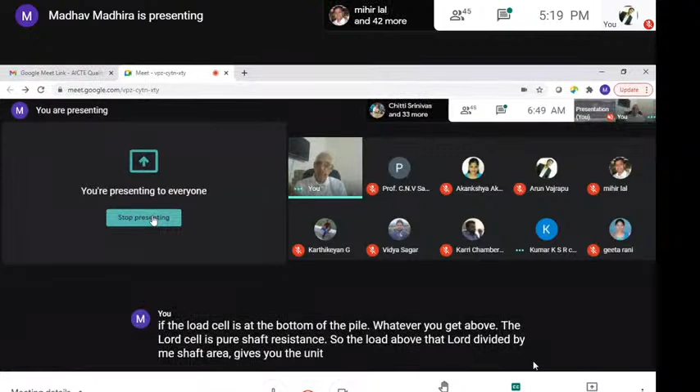Basically, you have two components. One is above the load cell, another is below the load cell. If the load cell is at the bottom of the pile, whatever you get above the load cell is pure shaft resistance. So the load above, divided by the shaft area, gives you the unit shaft resistance. And the load below divided by the pile cross section, you will get the base load. And you know the displacement, so you can always use that to predict your under working loads.

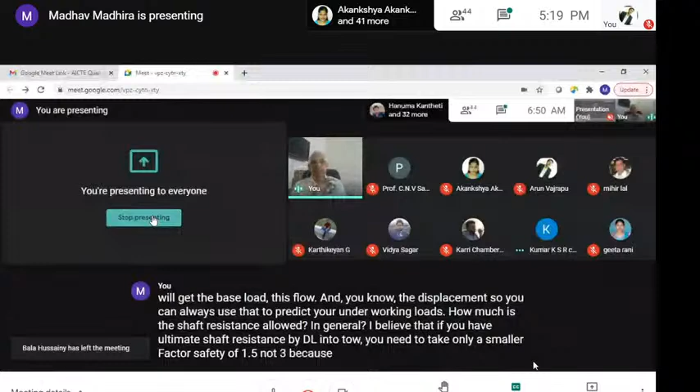How much is the shaft resistance allowed? In general, I believe that if you have ultimate shaft resistance, pi dl into tau, you need to take only a smaller factor of safety of 1.5, not 3, because whether you like it or not, all the shaft resistance will be mobilized. Whereas for base resistance, you need large displacement. So I use a factor of safety of around 3 for the base. But I find in my experience, unless you have extremely soft soil, the base load is usually around 10 to 20%.

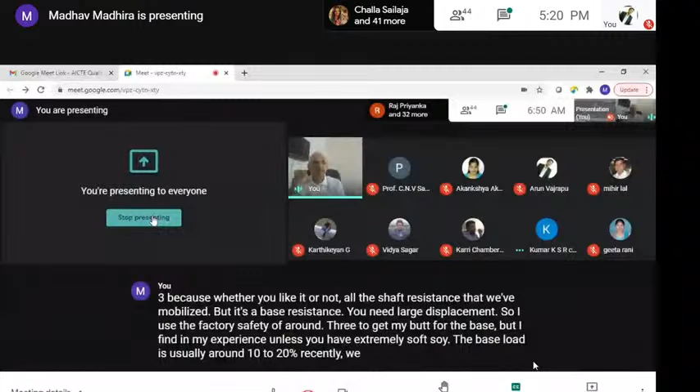Recently, we found another interesting case. There was a stiff layer in between, and if the pile is stopped at that place, we could get good base resistance also instead of going below the stiff layer. It's a thin stiff layer, a couple of meters thick. The pile diameter is only about 400, 450, and the thickness of the layer is about 4 or 5 times the pile diameter.

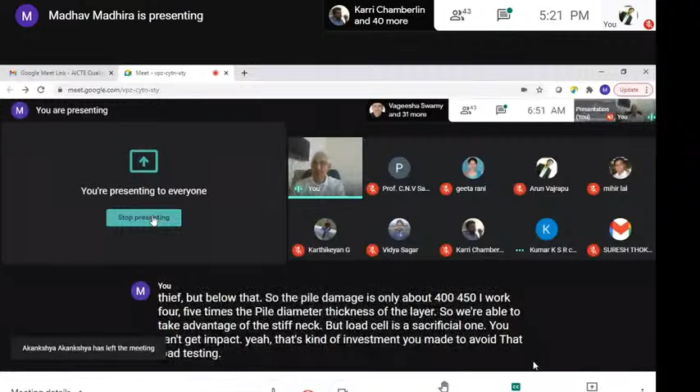So we are able to take advantage of the stiff layer too. But the load cell is a sacrificial one. You can't get it back. That's the kind of investment you make to avoid dead load testing. Dynamic testing is very good, but the problem is you have to interpret. You're not measuring it. What you're measuring is the dynamic response, the wave propagation, and we have theories, but again, everything depends on how good our input is.

Okay? Okay, sir. Okay. Hello, sir. Yeah, sure. Yes, hello, sir.

Good evening, sir. Sir, actually, it was mentioned that when we do the cyclic load test, between the pile and the soil, sometimes a gap can originate. So that will be lateral load test. Lateral load. Okay, sir. So if it happens, what are the measures we can take, sir?

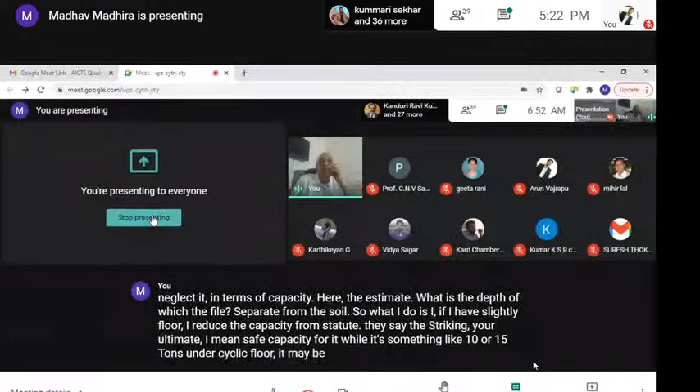What you do is you have to realize the depth of the separation, which you neglect in terms of capacity. You have to estimate the depth over which the pile separates from the soil. So what I do is, if I have cyclic load, I reduce the capacity from static load. Let's say the static load safe capacity for a pile is something like 10 or 15 tons. Under cyclic load, it may be only 2/3 of that because the separation will not give me the bearing on the top of the pile. So cyclic load is different from the static single load kind of. Clear? Okay, sir. Yes, sir.

Yeah, thank you, sir. So just one more doubt. Sir, in the very last slide it was mentioned the calculation of IS code, and when we do the calculation on our own, when we correlate, sometimes the values can vary between these two. So when it varies, which value should we consider, sir? That's what I told you.

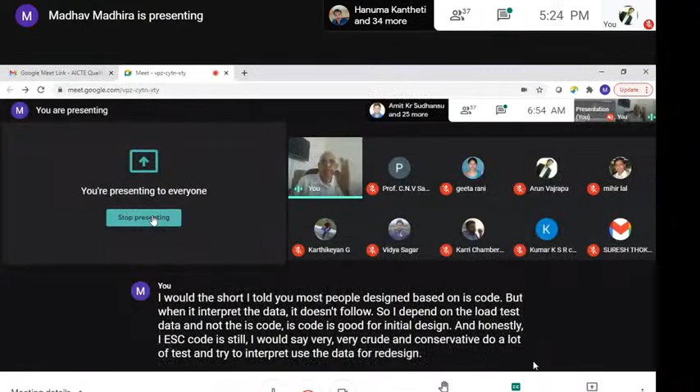Most people design based on IS code. But when I interpret the data, it doesn't follow. So I depend on the load test data and not the IS code. IS code is good for initial design. And honestly, IS code is still, I would say, very, very crude and conservative. Do a load test and try to use the data for redesign. The problem is people go for IS code and you sometimes find IS code is over-predicting and in a few cases it's under-predicting. Now, if it is over-predicting, I'm in trouble. Under-predicting, I'm safe, but expensive.

So this is how you do a load test and evaluate your design. And you modify the design. As I said, recently we had to do that because many times the code cannot take care of all the possibilities. If I have SPT N, I take 2 times the N value for shaft resistance and maybe 4 or say 10 times that for base resistance. It's a very crude estimate. They want to be very conservative and the consultant wants to be very safe. He doesn't want to be sued because of using his judgment. So he designs according to the code.

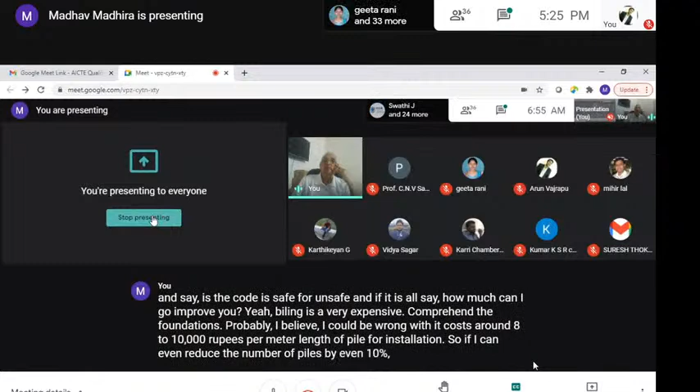But if you are one at the site, do an actual load test and ask, is the code safe or unsafe? And if it is over safe, how much can I improve? Because let me tell you, piling is a very expensive component of foundations. Probably, I believe, I could be wrong, but it costs around 8 to 10,000 rupees per meter length of pile for installation. So if I can reduce the number of piles by even 10%, I save a lot of money for the project. And otherwise, if you're under-predicting or over-predicting, you may end up having too much settlement. So always validate with your test.